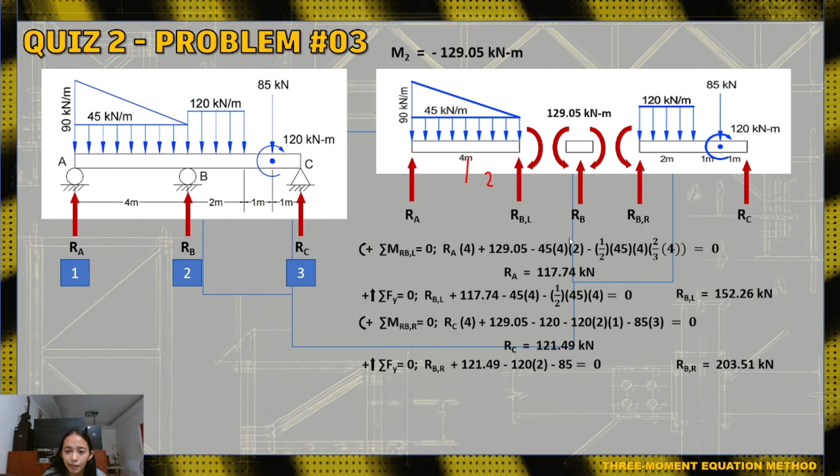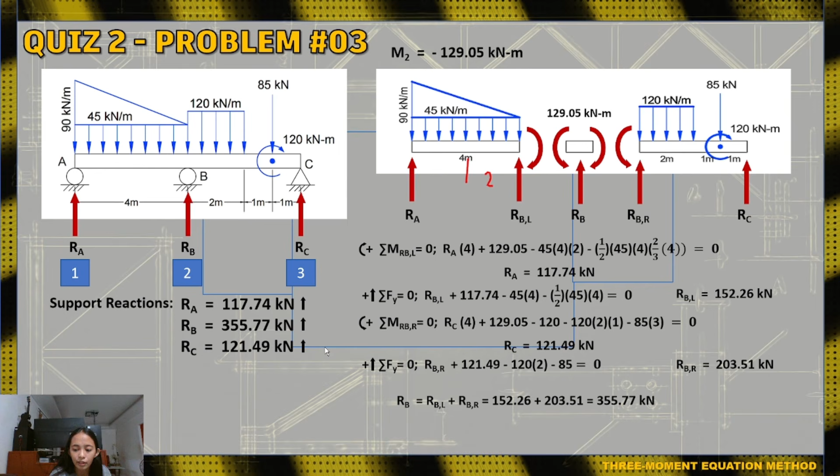So, nahanap na natin si RA, RB, and RC. So, ito siya, support reactions. RA is equal to 117.74 kN upward, RB is equal to 355.77 kN upward, and RC equals 121.49 kN upward. Then, yan na yung answer natin. So, nakuha na natin yung reactions sa roller A, roller B, and pin C.